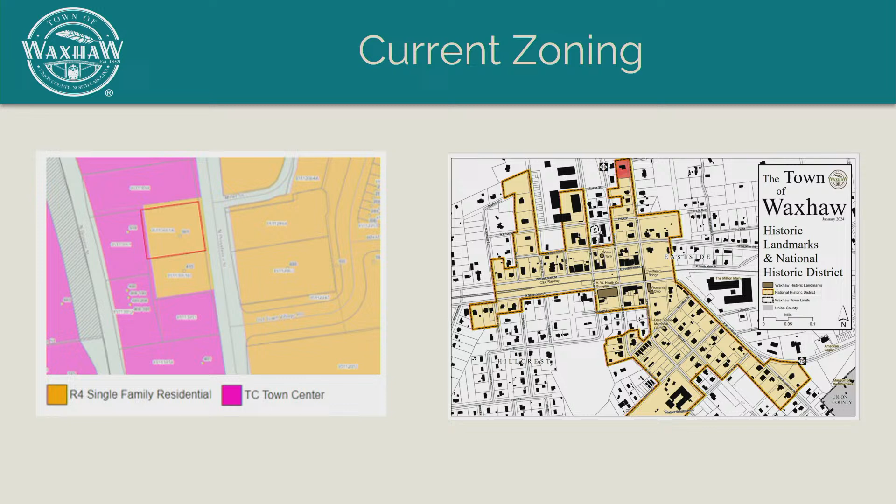So depending on the use would depend on how much parking we need. There is an existing driveway parking area, I believe. Screening, since it's going to be commercial use.

We'd also have to consider that those residents would be impacted by light 24/7 for the parking lot, correct? And the commercial activity? We do have a lighting plan that would have to be submitted. And right now we're at the rezoning, not the use, and we don't have a site plan as of yet.

I just see that for me, I think there's some worries and concerns that I don't think we can address with the general zoning. But I appreciate and thank you for answering my questions. Was there any feedback from the neighbors across the street?

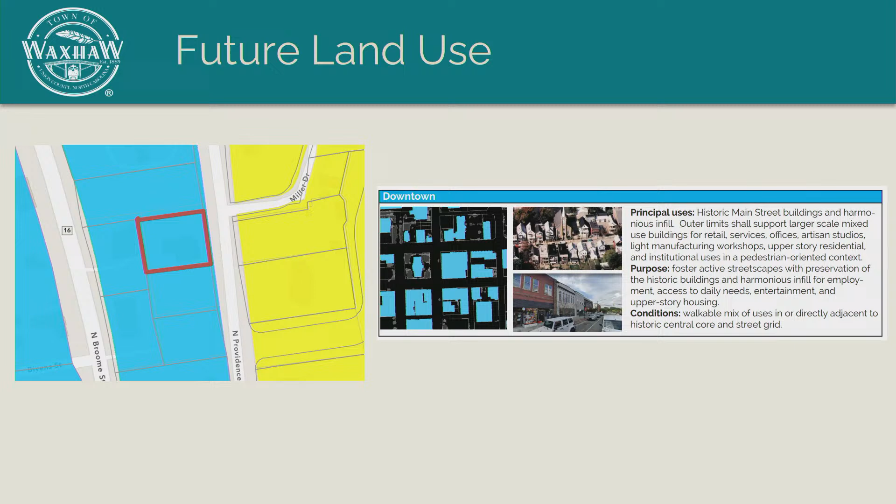Yes, it was in the packet. The feedback was in the packet, I believe, correct? From the neighbors, was there any responses? No responses. There was one comment from a resident further up on North Providence Street, but no official comment. So there was one comment from a nearby residence? Yes, I had one comment.

Was that residence within the notification zone? Were they part of the list of notified residents? Yeah, right, we didn't send anything out yet. That's before the public hearing. Before the public hearing? Okay. Before the public hearing for the BOC. Thank you.

Any other questions? Can I get a motion for the rezoning? We have two: rezoning petition RZ 015813, and rezoning RZ 015814. Oh yes, can I start with... go ahead, I'm going to start with RZ 015813. Can I get a motion?

I'll make a motion to accept the rezoning. We have a motion on the table. All those in favor to accept the rezoning petition RZ 15813.

There's an existing sidewalk that would be improved as development comes in. One of those developments would be as the result of that recent rezoning to the property on Arbor Drive at Old Providence. So anywhere where you have that sidewalk, I know there is existing sidewalk there, but it would be improved and brought up to standard as those developments occur.

So with that in mind, and our goal is to improve pedestrian walkability within our NC area, and this location is currently located on a small side street, not on the major thoroughfare. Is there any road improvements that they would be required to do to improve pedestrian access?

So you're talking about the main road, on Ethel Street itself? Yes. Yeah, I mean, this is a particular situation where it's close to Old Providence, but it is one lot inward.

Yes, but so Ethel Street doesn't have a major sidewalk planned, but they would need to build sidewalk along the segment of the development. And that would also be true of any NC properties developed across the street from it.

So for Ethel Street, essentially, we would need to possibly take a look from an engineering perspective to make sure that we're coming up with proper setbacks along Ethel Street so we can make improvements to support that type of commercial activity. The setbacks are part of the zoning. I think setbacks are part of the zoning for this one? Absolutely, setbacks are always part of the zoning.

Do we get easements to help support the sidewalks with this rezoning? I don't think we do, but that's why I'm asking to take a look at it with an overlay to help with those things in our future.

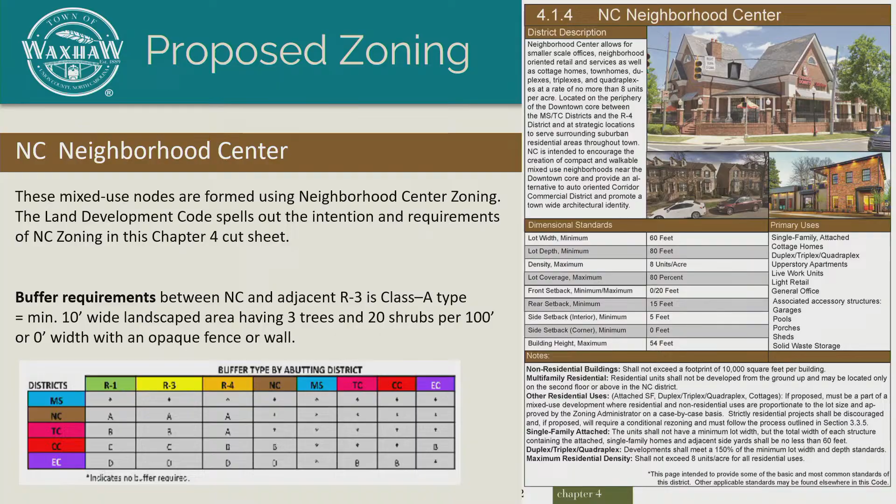On Ethel to Old Providence. Is there any proposed improvements to help that area that has been historically residential, but now we're looking at expanding it? And not only are we expanding it in commercial, which would also drive our TIAs, even our mini TIAs, but we need to start thinking about what kind of pedestrian plans these back streets are going to have.

Yeah, that's a good point. So one thing the town is working on now is part of a federally funded program called Safe Streets and Roads for All. That's a federal program the town is utilizing to develop an implementation plan. We already have the pedestrian plan itself, which was recently updated in 2023. That pedestrian plan outlines various pedestrian improvements throughout the town. We need an implementation plan to apply for federal dollars.

So the town is currently working through that now as part of the Bipartisan Infrastructure Law. We are going to apply next year in the final round of applications, and that available funding is approximately $1 billion. Average awards have ranged between $2.5 million to $25 million. Obviously the town would be responsible for a 20% match, and that's something we are just now starting through our task force implementation to develop that implementation plan to move toward getting those federally funded dollars.

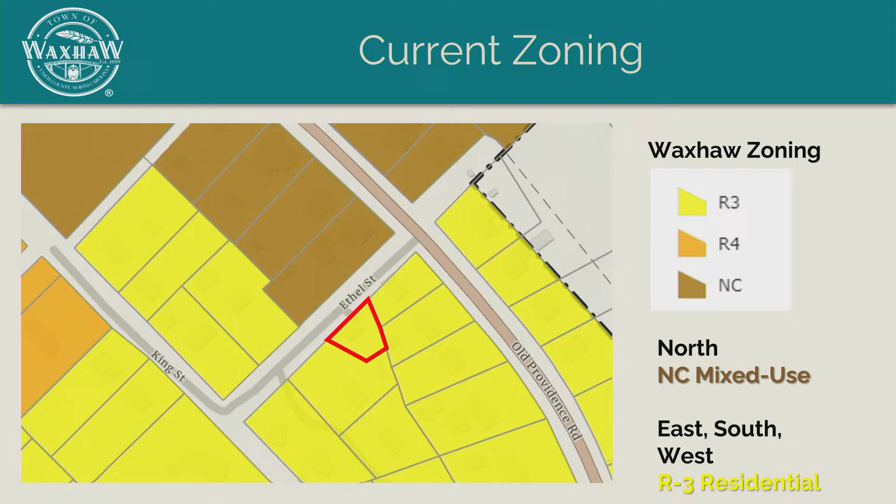It's kind of on a side street, being Ethel, that's a little street. One of my things was making sure, and it goes back to the question of why, that we're working not just for now but for the future, trying to be comprehensive when evaluating these things and address some of those needs. But I do agree, it's a small domino.

It fits our future vision, our future land use map, but we want to make sure we're being mindful and good stewards of the challenges we'll probably face as we keep moving down that corridor. For us as a planning board, we're looking at it from the future land use map perspective, and then our Board of Commissioners would make that decision from there.

Just to remind everybody, the most recent rezoning I led was for this property at the corner of Arbor Drive and Old Providence. That was the same type of case, an R3 to an NC zoning, and it was adopted as NC. So you currently have NC zoning down here, and it goes along with the intent of the future land use plan for NC to extend down to this point, which is right across from the school.

So just to give it some more context. Anybody else have any questions or comments?

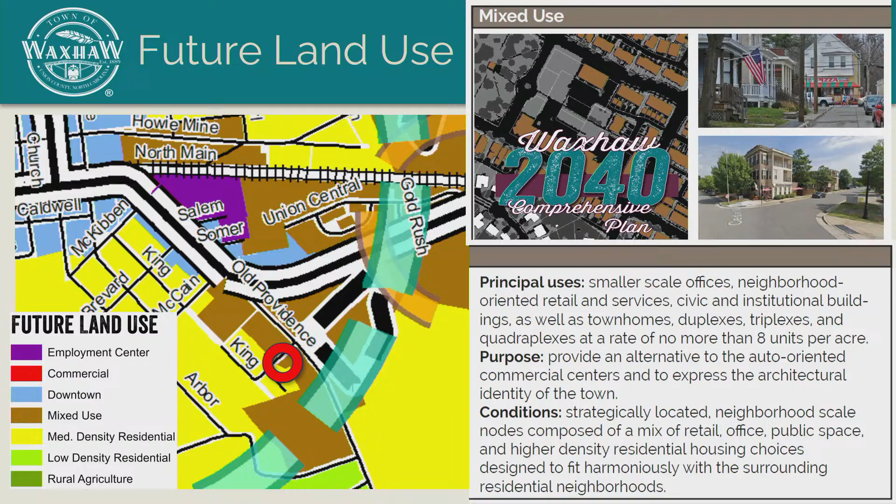My only concern is the side setbacks in this case, where it's an interior lot. I think it would be non-conforming because of the already established house on the setbacks. It's currently non-conforming, but it's a legal non-conformity right now. This would bring it into conformity.

Okay, yeah, I have one question. For commercial use, are there any guidelines for this size?

There's lots, it just depends on the type of use it would have. It's currently classified as a haircutting salon type of use, so there are certainly rules for that. But if you go through the land development code about any use that is acceptable within NC zoning, it narrows down the uses to what could be put in NC. It's not just any commercial use. There are specific uses, but it's still a broad list. Some of those are a special use, so they would have particular requirements to help them fit in better. So I don't know if that answers your question.

No, I guess you didn't answer. We can reference those codes when time comes. No, I got your answer. Okay, yeah, I'm good. I have a question, Blair.

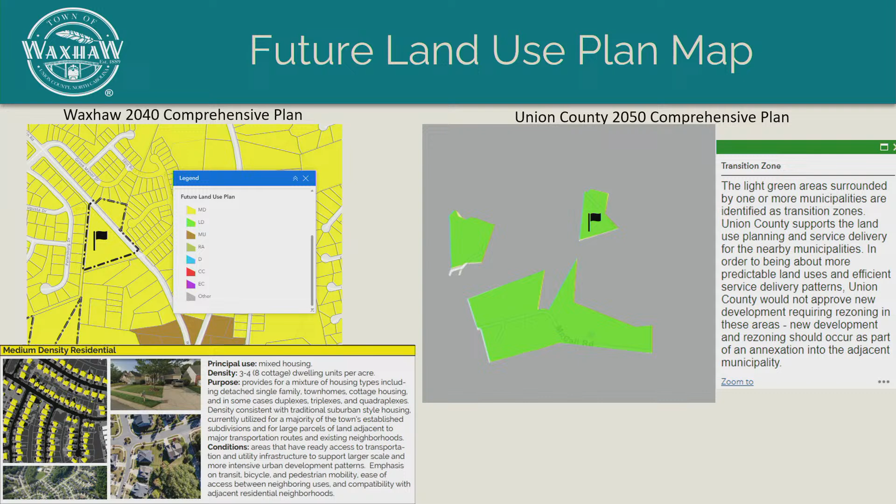So I have a land use plan consistency statement for you, and also a recommendation as one of your requested actions. Along with proposed conditions from the applicant and then conditions from the town, there are 7 conditions that we have on the site.

Condition number 1 is a reduction of the minimum lot width to 40 feet, reduction of minimum lot depth to 100 feet, reduction of the minimum side setback to 5 feet for the side, and 10 feet for the corner. Their minimum tree save is 30 feet on the western and southern property boundary, and single family attached dwellings or townhomes are not permitted in this development.

Any areas in the common open space that are disturbed shall be replanted in coordination with us and the Union County Urban Forester. The developer or HOA shall be responsible for the maintenance of the street trees that are installed by the developer.

The next requested action would be your consistency statement. As always, if there are any questions, the applicant is here as well, and they have a presentation, so I can either bounce to them for their quick presentation, or if you have a few questions for me, we can do either.

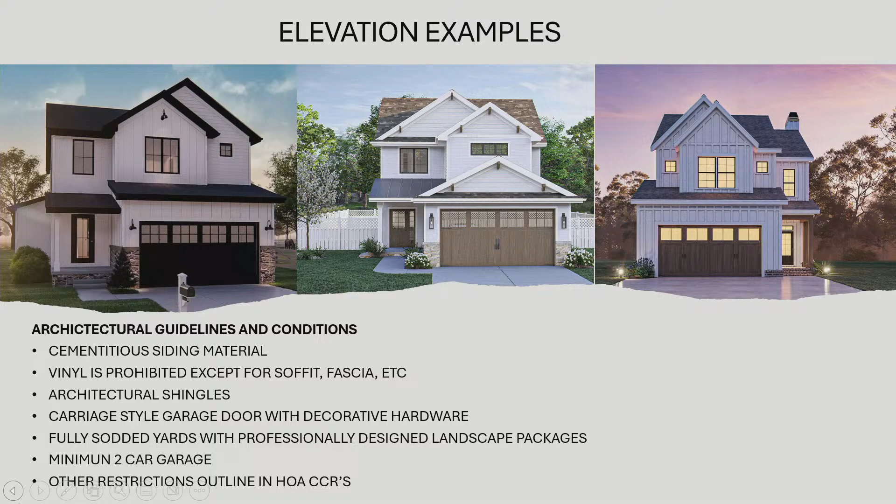And then finally—I think I sent the wrong one, but I did want to talk briefly about the community meeting we had, specifically feedback from the neighbors. We had a brief presentation with the residents, primarily of Millbridge and Grove Manor, and after that I talked for about 90 minutes, just answering a lot of questions and speaking through the process of the conditional zoning.

I think no one wants to have a new neighborhood in the backyard, but they were certainly appreciative of us preserving the site, and preserving the additional 30-foot buffer. I think knowing that once it's passed, that is what it's going to be—no one else can go in the future and change the site. And certainly knowing that we're going to work with Waxhaw versus going directly with the county.

Obviously traffic concerns always come up when you're talking with neighbors, and we've addressed that, showing them the minimal impact in terms of how many counts and how many trip generations the site would produce.

And with the benefit of adding that multi-use path, we'll have some additional clearing, so any sightline concerns were addressed as well. So I think all in all it was a very positive meeting. I hope many of those residents can attend the actual public hearing and speak on our behalf. They're pleased to see a site that preserves the site and doesn't just clear out their backyard. So, but yeah, that's really all I had. So, thank you.

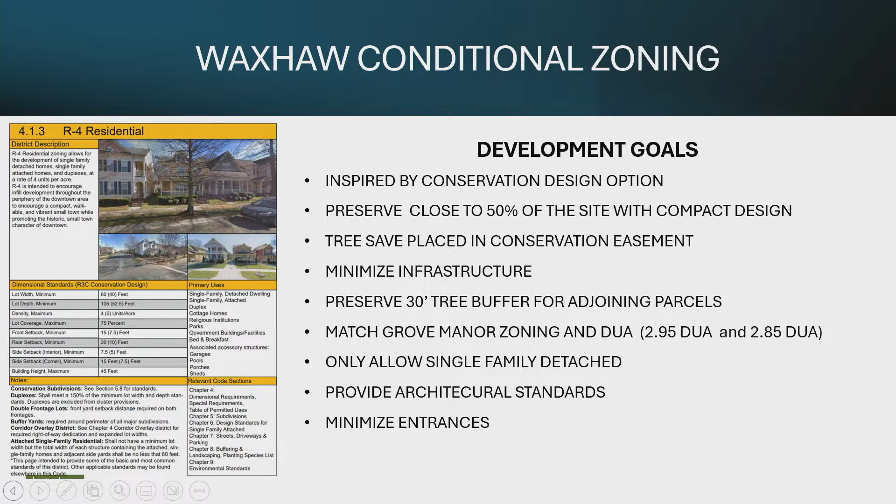Yeah, on the high-level site plan that you had, it showed the green area surrounding the 13 homes. I just wanted to make sure I was understanding correctly. So the green area will be untouched. When you say tree save area, you're not doing any clear cutting in that green area? Correct. I'll need to go to the... Can you bring up the actual site? Of course. You've answered the question.

That was the primary goal, was just to not touch that. So we'll have established clearing limits. We're only going to clear what we need, and the rest will be, again, part of the conditions that area will be preserved, putting in conservation easements and so forth. Okay.

And I think just to add, there's the option to go to fee in lieu for the park space. The residents didn't want to see a park here, they didn't want to see additional land taken up for that. So that's why we decided to go the fee in lieu route.

Okay, my other question is, not specific to you, but I'm a newbie, so this is really my first deep dive into any proposal. And I found that when I was reading the notes from the developer meeting, there are a lot of non-factual statements, like 'residents were satisfied with the answers provided' as a statement in the summary notes.

Sure. I'm just wondering, is there any, on the town side, obligation or opportunity to share the entire transcript, or share an opposing view of what the temperature in the room was, or is it recorded and preserved so people can go back and watch the meeting?

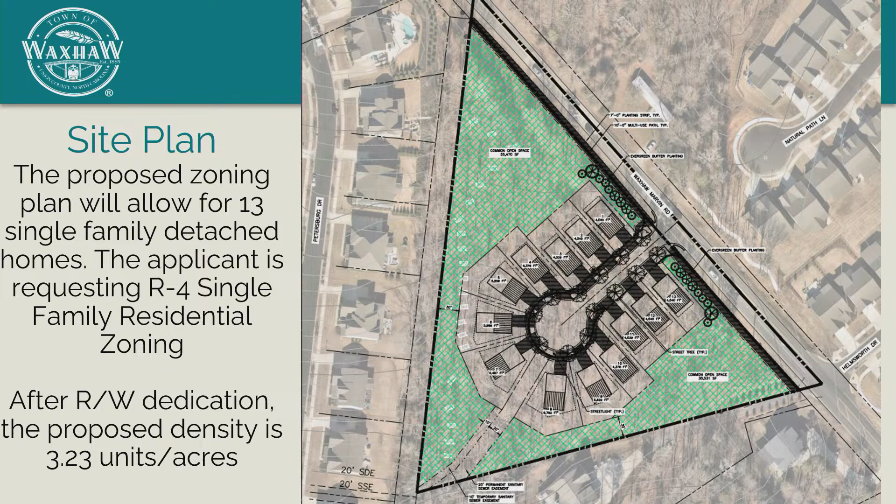Can I get a motion on conditional rezoning CD 007-2024? This is a request with a modification to the proposed condition. I can make a motion for favorable recommendation for CD 007-2024 to the Board of Commissioners, with modification to the proposed conditions by adding condition number 8.

Can I get a second? I'll second it. All those in favor? Aye. Thank you very much, appreciate the conversation on that.